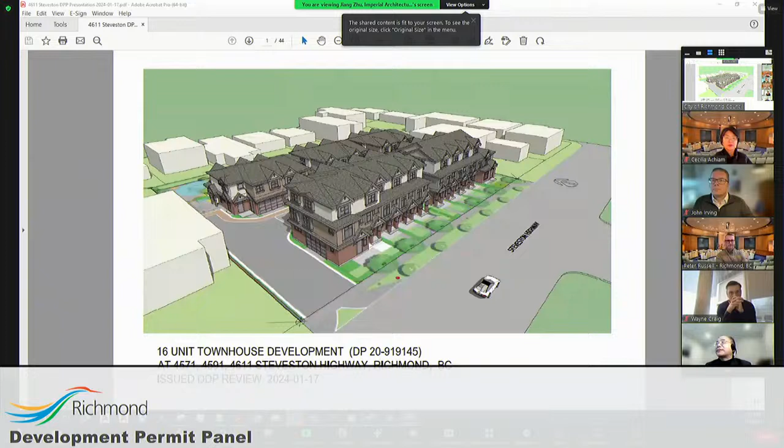Thank you very much. My name is Jiang Zhu. I'm the architect with Imperial Architecture. We are the architect for this development. And I'll share my screen. Could you see the screen? Yes, we can. Thank you. Yes, thank you very much for having us.

Today, we want to present the 16-unit townhouse development along Steveston Highway. The project site consists of 3 single-family sites, and it's located on the north side of Steveston Highway between Railway and Number 1 Road.

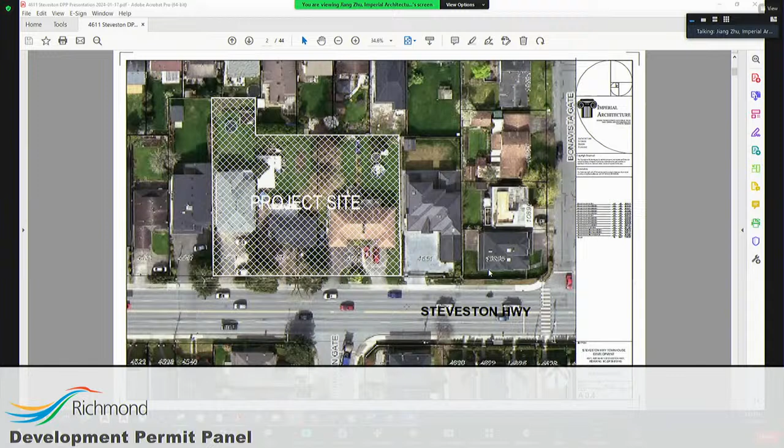During the design stage, rezoning stage, we worked with the planning department on the siting and the forms, and we tried to propose something which can be mixed into the local neighborhood in terms of architectural style.

This is the overall site context plan. We proposed 5 buildings on this site, and there are 2 three-story buildings along Steveston Highway, along the arterial road, and there are 3 duplex two-story buildings at the back with the driveway in the middle.

As you can see in the streetscape, we proposed a big roof on top, and to treat level 3 as dormers or attics. Although they are really level 3, the architectural style is compatible with the adjacent buildings, and the height is not out of scale.

And these are the calculations, statistics. We complied with the bylaw in every aspect except only for the front yard setback - we propose to relax it from 6 meters to 4.5 meters. The main reason is we gave more space at the back. The bylaw says we only need a 3 meter rear yard setback, but in consideration of the privacy with the single-family housing behind, we propose to increase it to 6 meters, so double the rear yard setback. Meanwhile, we reduce the front yard setback a little bit from 6 meters to 4.5 meters.

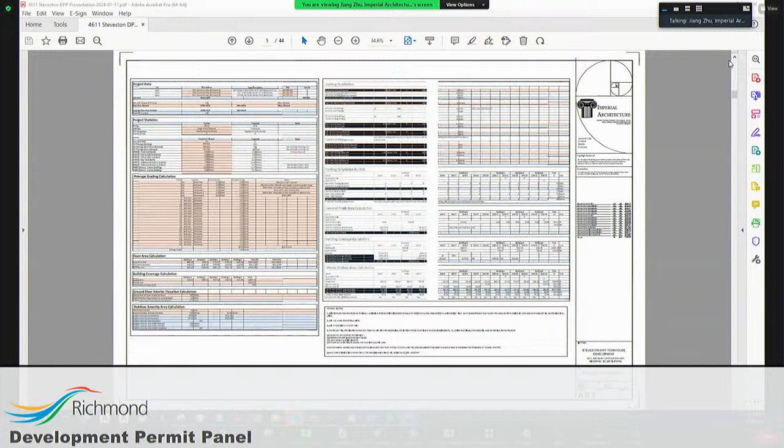So in the rezoning stage, we proposed a future development potential plan. Adjacent sites can do a mirror image of our development by sharing the driveway - they don't need to have a second driveway, they're going to share the driveway. And then they can have a consolidated, bigger shared outdoor amenity space.

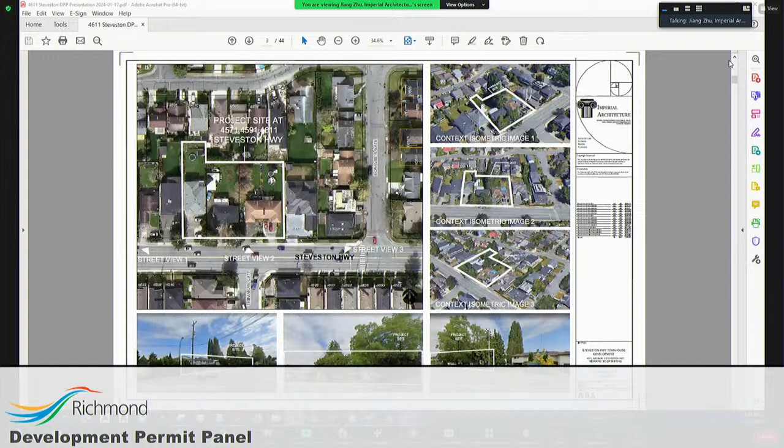For the character, we propose to use the typical so-called West Coast style with Hardie panels, bay windows, and gable roofs as the architectural language for this development. And since we have 5 different buildings, we need to tie these buildings together. Meanwhile, we want to create some differences so each building can have its own identity.

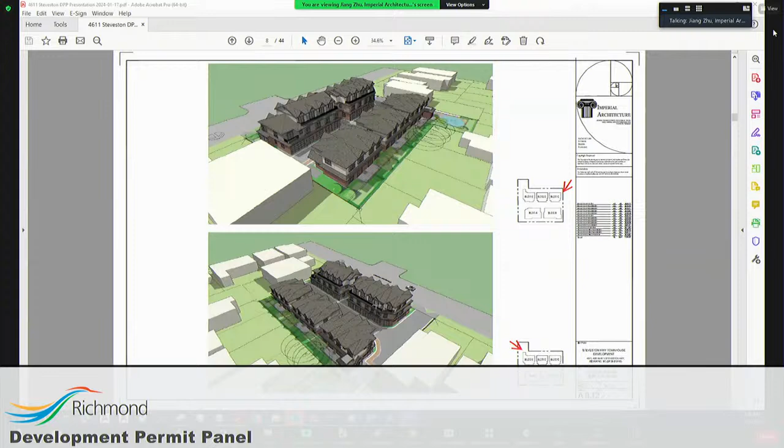One method we used was we proposed red brick cladding on all buildings, on all sides - that is like a base, a solid base for all buildings with the same color, same material. Then on the upper floors, we propose to have different colors for the Hardie panels, and even every 2 adjacent buildings will have a different color scheme. We proposed multiple color schemes.

And also we went through the shadow analysis to demonstrate there was no shadow impact to adjacent buildings.

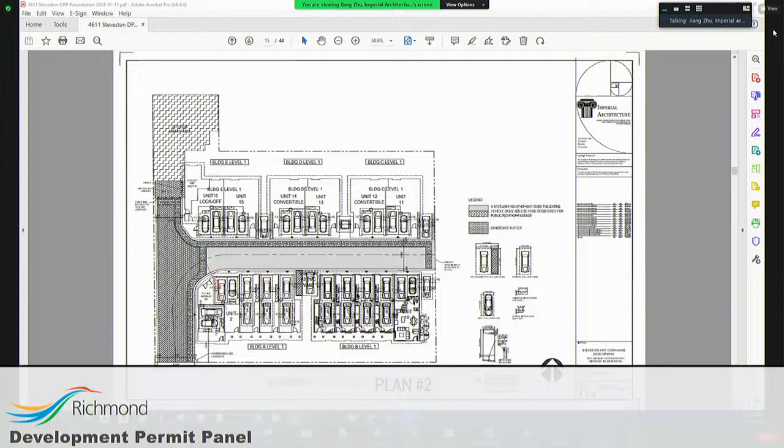We complied with the city's parking bylaw. Most of the units have side-by-side parking, and only a handful have tandem parking. However, it is still within the allowed limits by the parking bylaw.

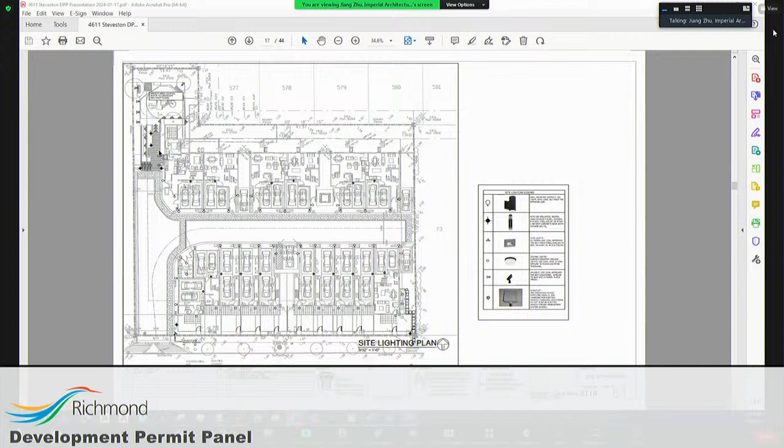Here is the site lighting plan. Every unit in the private garage will have 2 EV chargers. We also propose some exterior lighting in the common area along the driveway for CPTED considerations, and also in the landscaped area. The landscape architect can elaborate more on the lighting design and landscape design in the outdoor amenity area.

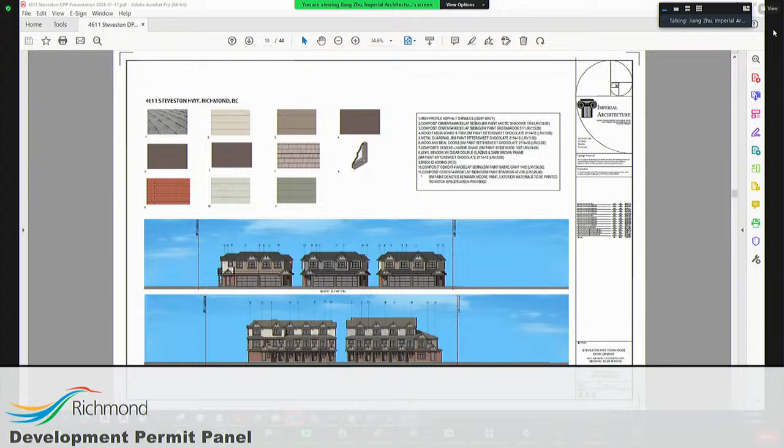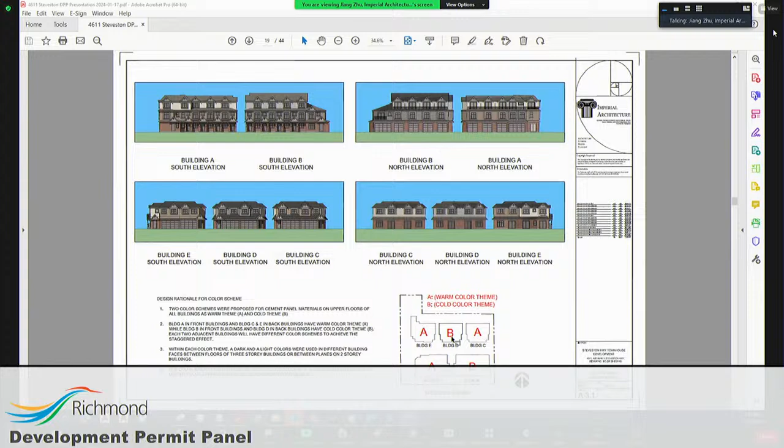This is the color scheme we proposed. We have scheme A and scheme B, with warm tone and cold tone, strategically located so every 2 adjacent buildings will have a different color scheme to make the design more interesting. And this is the sections.

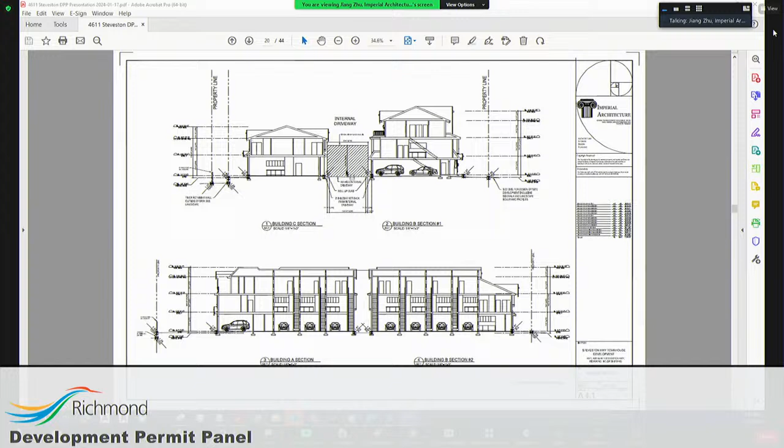We have a 3-story building along Steveston Highway, and a 2-story duplex building against the single-family housing. In the middle, we have the driveway with 4.6 meters height clearance for garbage trucks and fire trucks to access.

For accessibility, all units will have ground level access doors, which can be easily used by wheelchair users. We don't propose any long steps or stairs at the main entry, and pedestrians can use the shared driveway pedestrian walkway to access all units. The outdoor amenity area is fully accessible as well, with a ramp designed there.

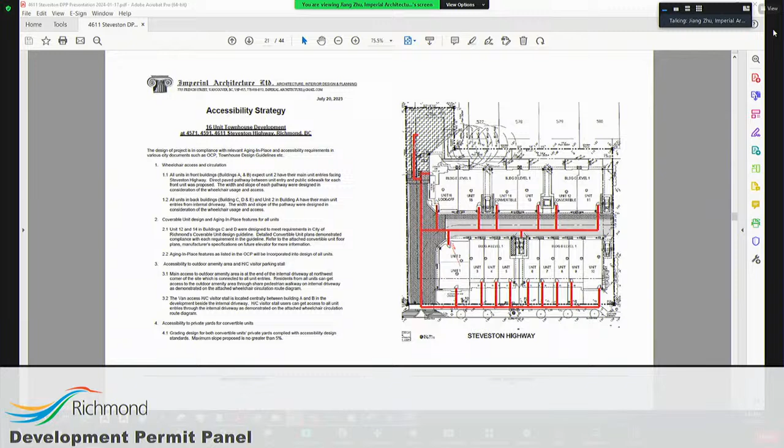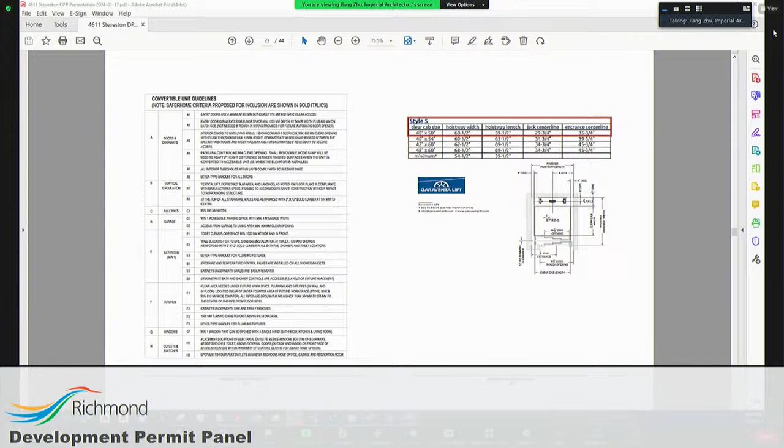We proposed two convertible units fully in compliance with the city's convertible unit design guidelines, with the ABCD criteria, and we elaborated on our drawings how we met these requirements. We also proposed a future elevator, with the shaft built with the floor and pit designed to suit the future elevator.

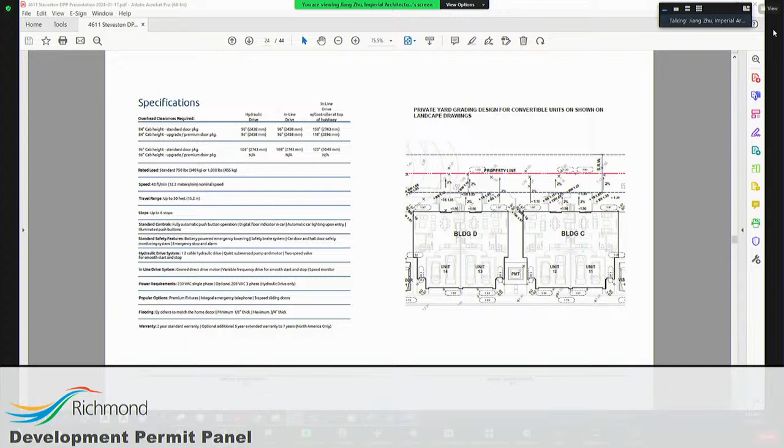This is the elevator specs, and the landscape design for the convertible unit at the back. The rear yard is accessible as well via the deck.

We engaged the energy consultant JRS to help us with the step code issues, and they produced an energy report elaborating how we can meet the step code requirements.

I think that's all from architectural, and I'll hand it over to our landscape architect, Ethan.

Good afternoon, everyone. My name is Ethan, and I am the project landscape architect for this project. Thank you for being here today. For landscape design, I just want to highlight three major things in the landscape.

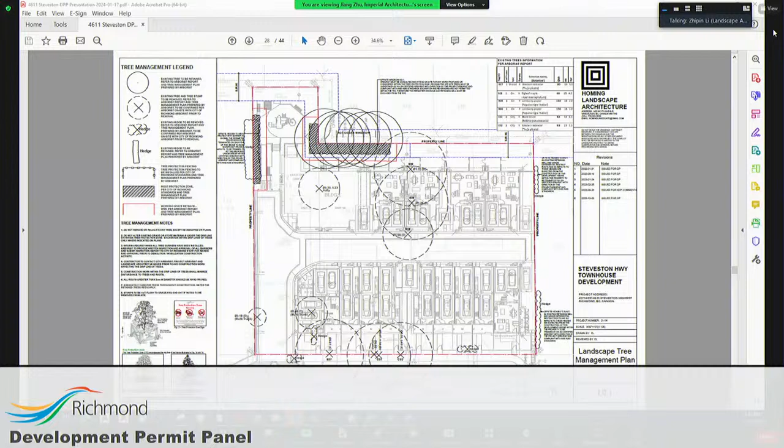Second, we also try to minimize existing grading changes in the landscape design. The large outdoor amenity space is located on the existing grade, and we provide a ramp for wheelchair users to access it. Meanwhile, for buildings close to our north neighbors, each unit will have a private outdoor patio space, but the patio is elevated so the overall backyard is on the same elevation as our north neighbor. So we don't make any grading changes between our property line and our neighbors. This is how the landscape design respects the existing site conditions.

The second thing I want to highlight for the landscape design is how we respect the privacy of our neighbors. Go to the next page, please.

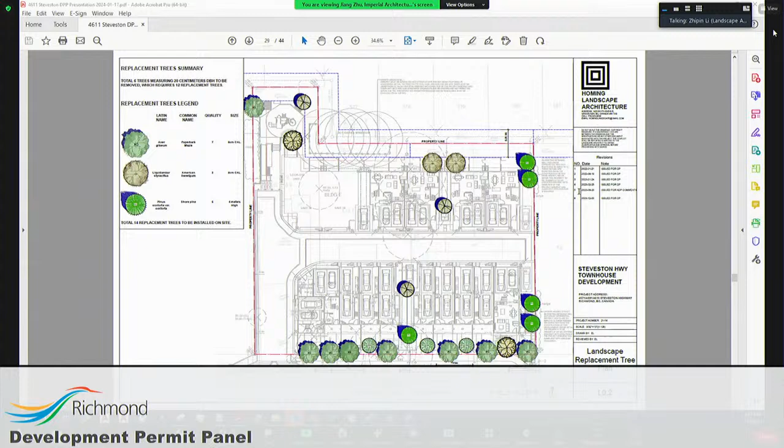As I already mentioned, the evergreen trees and hedges were retained to ensure privacy. Between our property and our eastern neighbors, we have a relatively wide landscape buffer between Building C, Building B, and the property line.

We propose several evergreen trees in the landscape buffer to protect the eastern neighbors' privacy. The third thing I want to mention is the overall landscape design, trying to bring nature close to local residents. We've used a lot of native plant species so residents can learn about them and enjoy our local nature landscape.

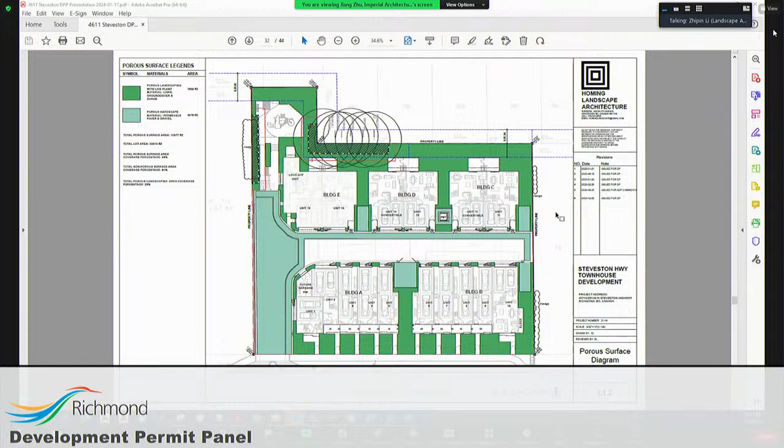We have a relatively large outdoor play area for children, with a few benches for parents to sit and watch them play. In the right-of-way close to our north property line, we keep open lawn areas for multiple flexible programs, for either children or parents. Outdoor lighting is also considered to provide a safe space for people at night.

A few bike racks are provided at the entrance of the outdoor space, along with a post mailbox. I believe all these programs will work together to attract people outdoors to meet their neighbors and do more social activities, which will benefit residents' physical and mental health.

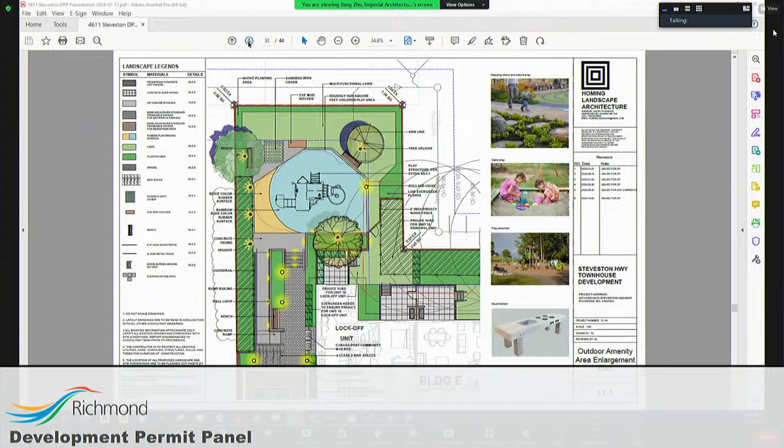For the outdoor amenity space, we also consider the future situation when the west property is developed. The turnaround space at the corners for vehicles will not be needed anymore, so we change these turnaround areas into additional outdoor amenity space.

We put a couple of composite wood picnic tables and benches on the paved areas. Between the benches and the property line, we also propose raised wood planters with three trees to create a landscape buffer between our space and the neighbor.

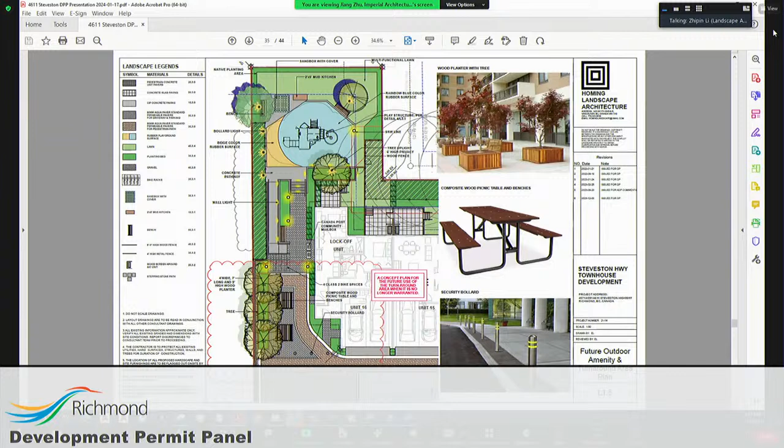Next, please. This is the planting design of the project. As I mentioned, we have used lots of native plant species. I think that's all for the landscape design for this project. Thank you very much.

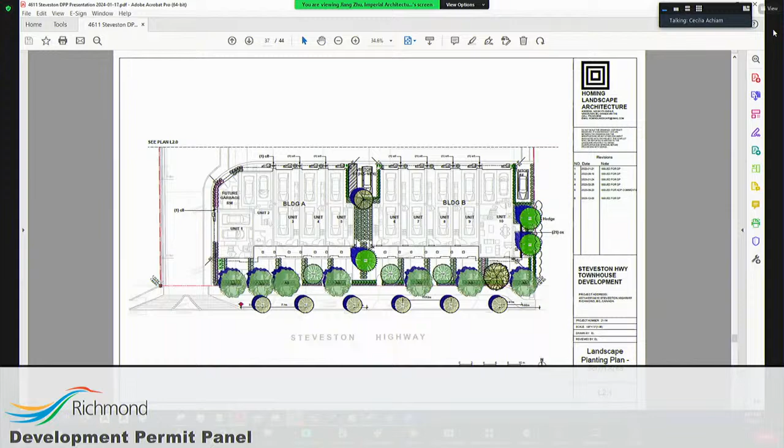Thank you. We will next go to staff comments before the panel asks questions. Mr. Craig, anything to add? Just a couple of comments, Madam Chair.

In terms of the applicant's presentation, the reference to shared amenity space with the potential future development to the west - I just want to clarify that there is no formal sharing arrangement secured as part of this development permit.

Sorry, I just can't hear Wayne. I don't know if it's my mic or my speaker, but it's very faint. Yeah, it's very faint. What? I'll see if I can increase that.

To start again: in terms of the applicant's presentation, there was reference to potential shared amenity space with future development to the west. I just want to clarify there is no formal sharing arrangement of outdoor amenity space secured through this development. That is a design intent which may be realized, but there is no formal sharing arrangement between the two potential developments. In terms of the development itself, this is designed to meet Energy Step Code 3 with on-site low-carbon energy systems.

There is a servicing agreement for frontage works and site services with this project. This servicing agreement will include the provision of turning restrictions within the driveway to ensure right-in, right-out turning movements. The front yard setback variance was identified at time of rezoning. There was also an acoustical report provided confirming that the units will meet CMHC internal noise standards given the proximity to the road and traffic along Steveston Highway.

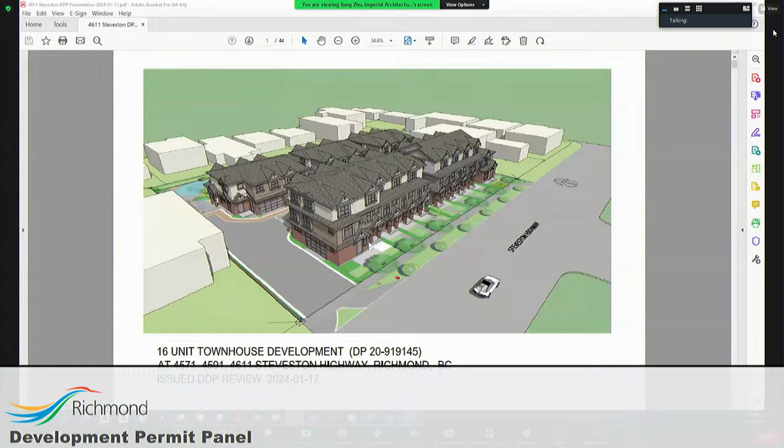Some units are the same, but the end units - the west end of building A is different, and the east end of building B is different. Therefore, the design is slightly different over there because of the roof geometry. However, it is still within the zoning bylaw height limitation over there.

So it's just an aesthetic treatment to provide some brightness. That's right, that's right, yeah.

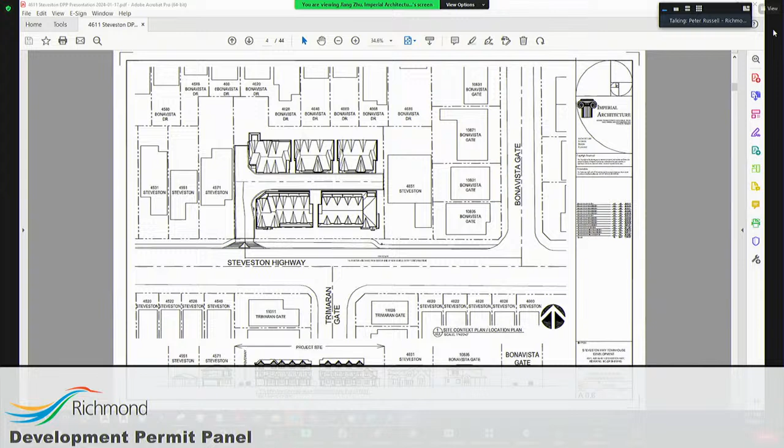Thank you, I just had one question, Madam Chair. I'm just looking at the entrance from the highway - is it only a right in, right out turn on the highway? Is that a policy of ours? I'm not sure, I just haven't been involved in too many Steveston Highway projects.

So you can't do a left turn if you're eastbound into the site? Yes, due to the proximity and the road, this does have turning restrictions. There are some instances where townhouse development does have those turning restrictions. Steveston Highway is quite common that we limit driveway access to right in, right out. Okay, thank you, that makes sense.

Okay, I have a couple of questions. One is I do appreciate relocating some of the existing vegetation and keeping the grades the same for the adjacent neighbor. It looks like there's quite a lot of care put in place for that. There seems to be quite a lot of paving as these projects have. Can somebody comment on whether you have made some effort to incorporate pervious areas into the driveways?

Yes, for the driveway, the city fire department has a very strict requirement for 80,000 pounds of load over there. Therefore, we normally use asphalt to comply with that requirement. However, during the design stage and planning stage, we worked with the planning department to introduce some pavers. They are permeable pavers, and with the special civil design and base layers, they can still support the fire truck load. It's a common treatment for this type of townhouse project.

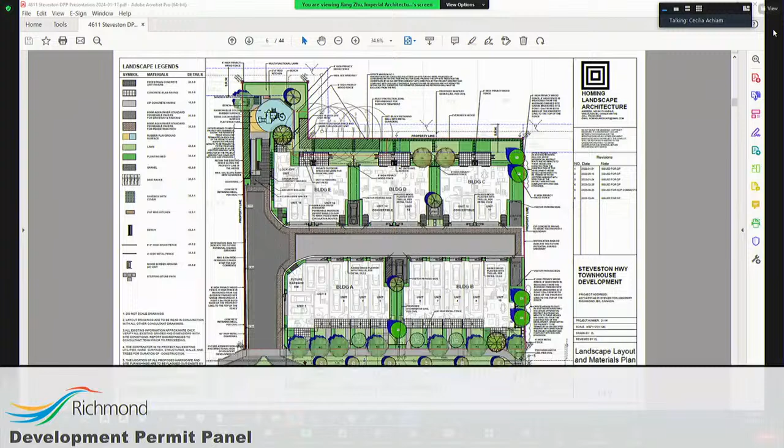Thank you very much, any further questions from the panel? Okay, hearing none - Mr. Clerk, is there anybody in the chamber from the public to comment or ask questions? There's nobody in council chambers. Thank you, is there any written submission? There's none, Madam Chair, thank you.

So in that case, there is a positive recommendation from staff, and generally I think that the design has taken into consideration future developments on both sides by allowing cross-access agreement, and respected the neighbors to the north by giving extra setbacks. So I'm happy to support the front yard setback as well.

With that, does anybody else want to make some final comments before we put this to a vote? Just echo that - likewise, I just wanted to also note the high performance on zero carbon with the electric boiler addition to the heat pump.

Okay, with that, can I have somebody move the staff's positive recommendation? Second. Okay, thank you. All those in favor?

Hello, everybody. My name is Karla Castellanos from KCC Architecture. I'm coming down with a flu, so I'm going to just hide myself a little bit, but I can still do the presentation. I'm going to ask Emily from my team to share the screen, please. If you can go ahead, Emily, please.

Thank you. So today I would like to make the presentation for a subdivision and new development application. In reality, it's not the subdivision at this time, but it's a development permit based on the subdivision of an existing property with an existing building. Next slide, please.

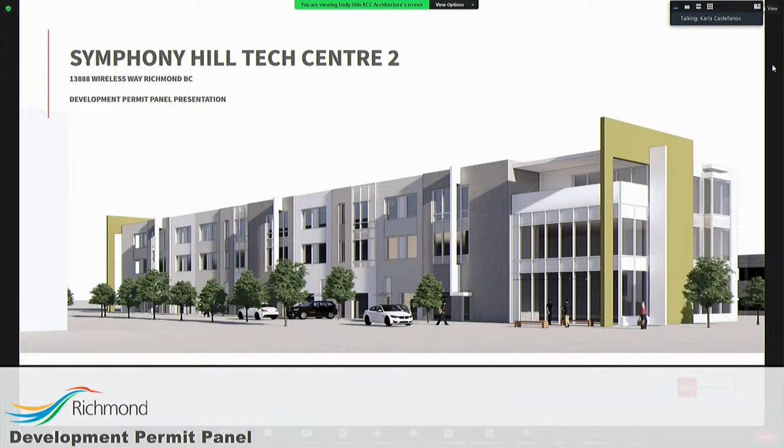For the introduction of the project: the project is located in a mainly industrial area with a business park development. Our project follows the initiative issued by the city a few months ago — actually last year or 2 years ago — to redensify industrial land.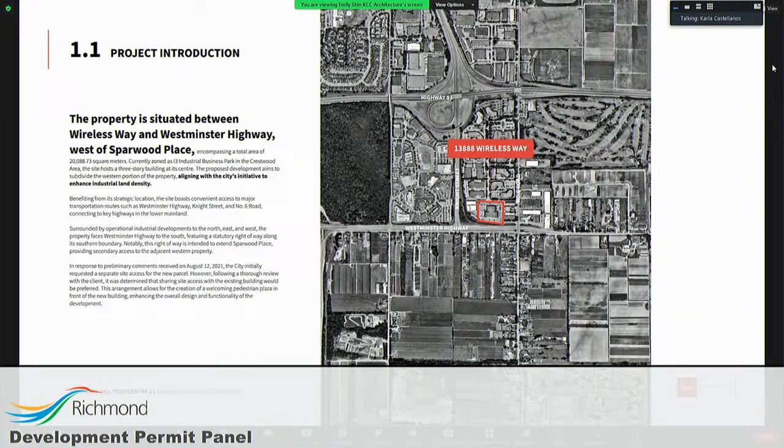For the project context, as I mentioned before, our project is located mainly within the areas of industrial development, business park industrial, and very close to the Richmond Auto Sales Center. Our main traffic will go through Westminster Highway, Number 6 Road, and Knight Street. Our project is zoned under ZI3, which is Industrial Park Development.

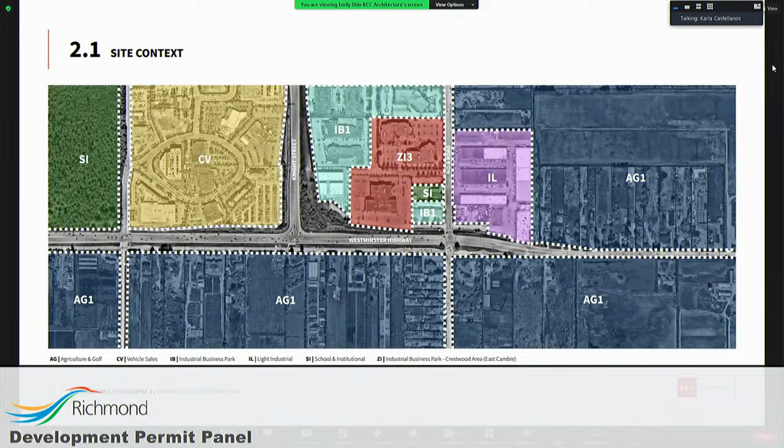The applicable policies and guidelines include climate action programs, community energy and emissions plans, development permit guidelines, flood protection management strategy from 2019, the official community plan, and waste management design guidelines.

Going into the design proposal: our proposal is to redevelop this existing site through a subdivision application, generating a new lot. The new building will house 3 stories, with the first 2 stories being multi-tenant industrial units. The ground floor will be the main warehouse, or working area, with the second story being office space, and the third story for additional office space.

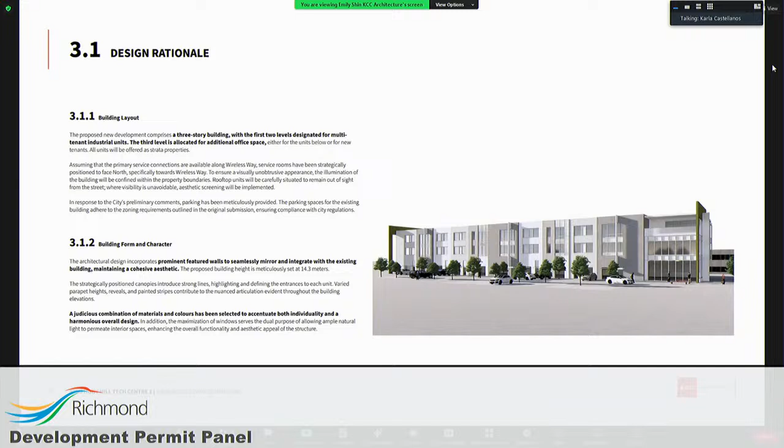The building form and character follow strictly what the existing building has. It mimics quite a bit the harmony, and also the articulation between the units and the colors. So the intent is not to create contrast, but the opposite — it will mimic and feel like an extension of the existing building.

The accessibility strategy is on the north side, facing Wireless Way, which is on the top of the sheet from this floor plan. There is a pedestrian access into the main building. For clarity of the panel, Lot 2 is existing, Lot 1 is new. There is the property line — the new subdivision is right in between these 2 buildings.

Unfortunately I cannot share my screen, but in between the 2 buildings, on the left side, which is Lot 1, is the new development. On the right side, as I mentioned before, is the existing building. There is no intention to have any barrier between the 2 lots.

Both lots are currently owned by the same developer. The intent, following the city's initiative, is to redensify the industrial lots and provide more space for potential tenants. For the accessibility strategy, from the top of the page at Wireless Way, there is an access point into the site.

We'll go into more detail in a second, and it connects right away with the main sidewalk adjacent to the new proposed building. For the existing building, as part of this development permit application, we're also providing another access on the right top corner. If you can see there's a hatch between the parking spaces, that is the pedestrian access we're creating from Wireless Way to connect to the existing pedestrian walkway.

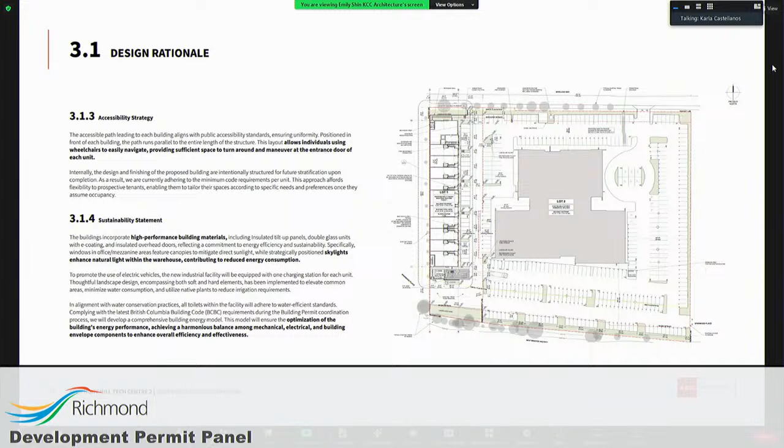Given that these are going to be tenant units, we're going to provide the minimum lighting and minimum heating and cooling. Every tenant will need to apply for a separate building permit application to outfit their own space. But as much as we can contemplate at this time, we are following energy performance strategies. Next slide. So in terms of the building setbacks and the legal of the property, I think this is a better slide

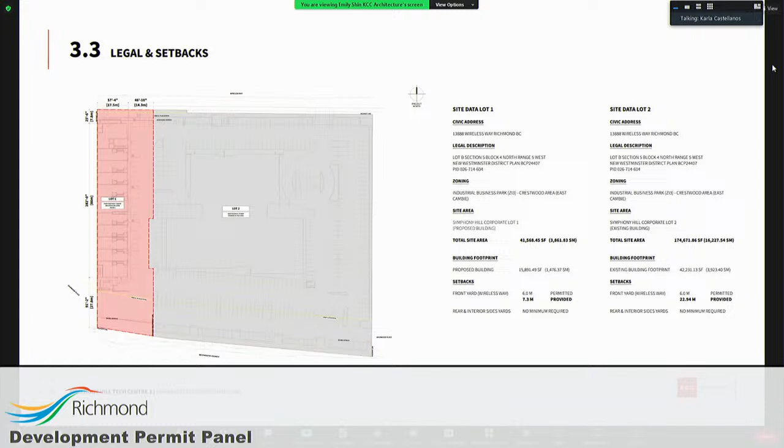to represent where we are proposing the subdivision between the two lots. To clarify a little bit, there is a jog in the proposed new property line, and this is just to reflect the spatial separation required to retain the existing windows on the existing building on the west side. Again, we're trying not to create any higher impact to the existing facility while redensifying the site. Next slide.

So we have developed project statistics for both sites. The existing site, in relation to parking spaces, had above and beyond what was required. So with this new development, the intent is not to remove the parking that is required by zoning in the existing building. Next slide.

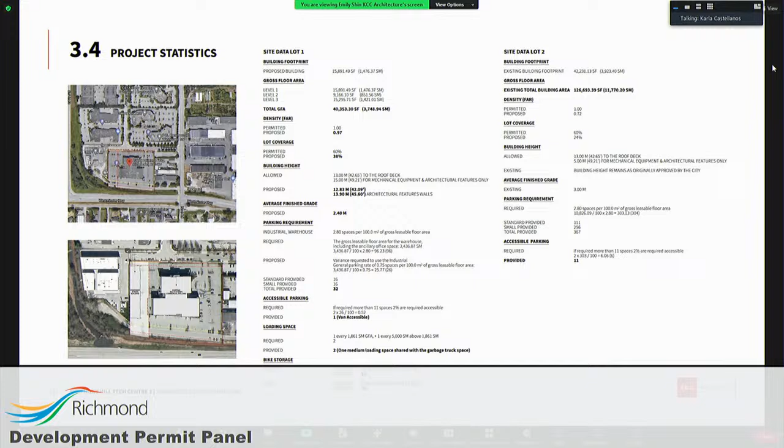which is still independent from everybody else. So we're trying to build this facility with flexibility, so the tenants that come can actually mold their own space, which in my view is already pushing a little bit the boundaries of sustainability, trying to make a building as flexible and useful as it can be. Next slide.

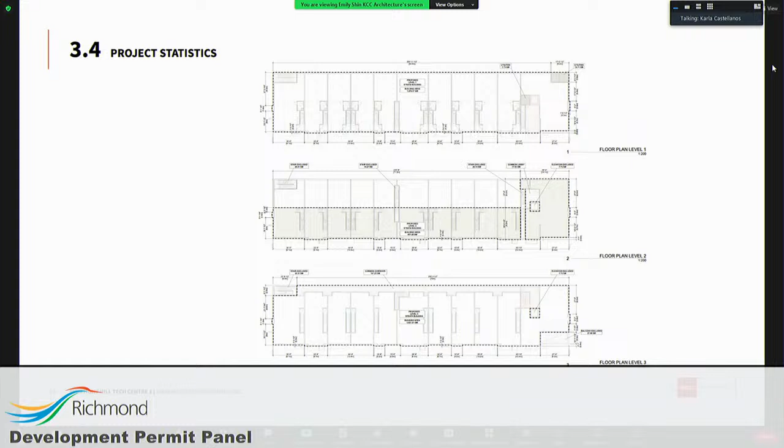The site plan, just to run you through: from the top, Wireless Way facing the street, we have the main access to the site on the right-hand side. We explored the option of providing a separate access for the new proposed lot. However, given the circulation of the site, the security, and the strategy the client wants for marketing not only this new building but the complex as a whole, the decision was to keep only one access point, which will be the existing access through the existing site.

As I mentioned before, the parking is basically shared; there is no boundary between the two developments. I also want to mention that on the bottom of the page, which is the south end of the property, there is an environmentally sensitive area. Currently, that area is completely used for parking; there are no islands, no treatment to that area. As part of this development, we have worked with planning to enhance that area and provide more green space across both sites, not only the new addition.

So as you can see there on the south end of the building, we have incorporated some islands in between the parking spaces to enhance that sensitive environmental area. And in the new lot, in the new property we are creating, the new environmental area is completely landscaped.

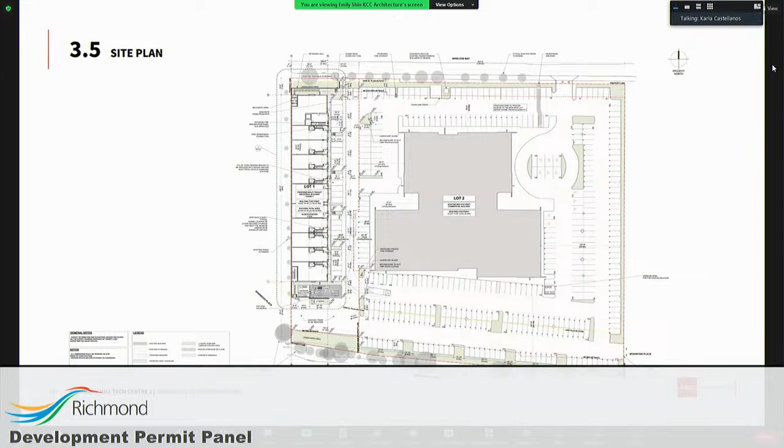There is parking in front of the units, where the intent is each unit on the ground floor will have an overhead door. The overhead door can be completely open, and the tenant can park right in front of it to download or upload any product. At the south end of the new building, we've provided the garbage facility with garbage collection space, and right beside it, a loading space as well to provide additional service to the tenants.

This would be an enlarged, more detailed floor plan. If we take any unit in the middle, let's say the fourth one from left to right, we have the overhead door, an independent entrance with a little vestibule. You come up the stairs to the mezzanine above. Underneath the stairs is an accessible washroom for each tenant. On the floor below, you'll see the mezzanines above where you can fit 2 office spaces, or 1 office space with a boardroom, and the stair which has access to the floor below.

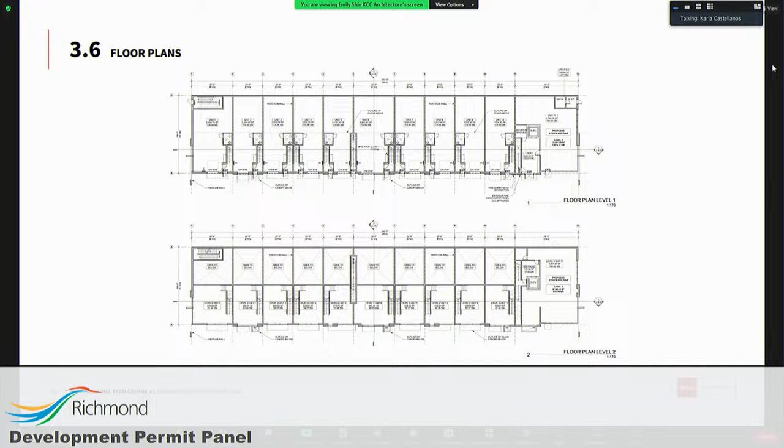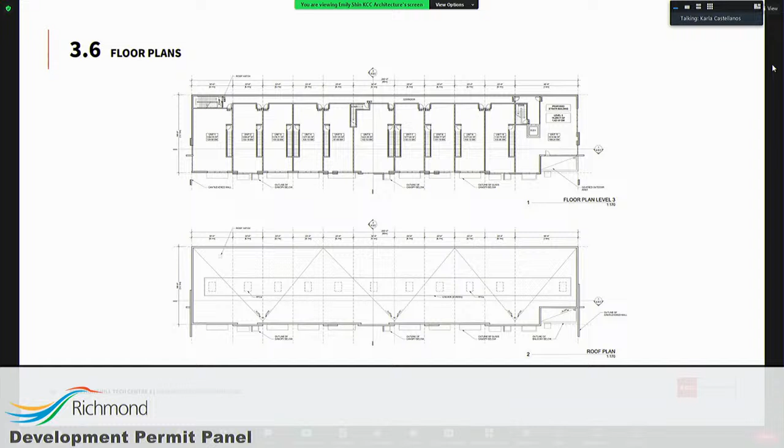On the 3rd level, we have independent units for office space. We've provided the stair to connect this office space to the mezzanine below, however this will be optional for each tenant as they desire. We've also done a study at the roof level to identify where potential rooftop or air conditioning units can be located. Based on our analysis from the street, they should be located in the middle of the building, and we will provide proper screening for any mechanical equipment.

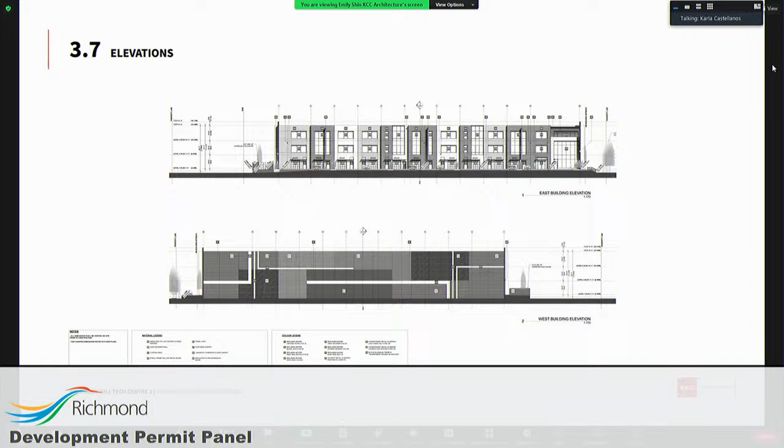These are the elevations of the building. As I mentioned, we're carrying a lot of the language of the existing building into the new building. One of the more challenging design components is precisely that west building view. To maximize the building layout and footprint, our strategy was to place the building right at the property line, creating this flat facade. We cannot have any windows opening to a neighboring site, but my team and I decided to treat that wall with different textures. This is tilt-up construction, which can actually have many patterns within it that are quite appealing to the eye. Our intent is to create an interesting pattern with interesting colors to mitigate that flat, stark view from the neighboring site. The building is quite narrow and long.

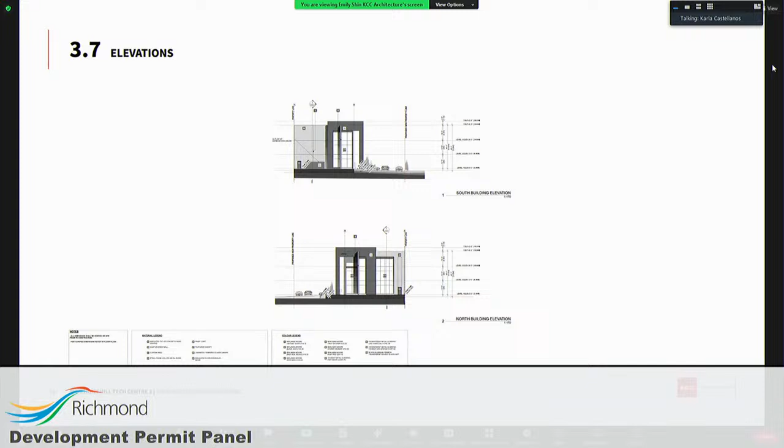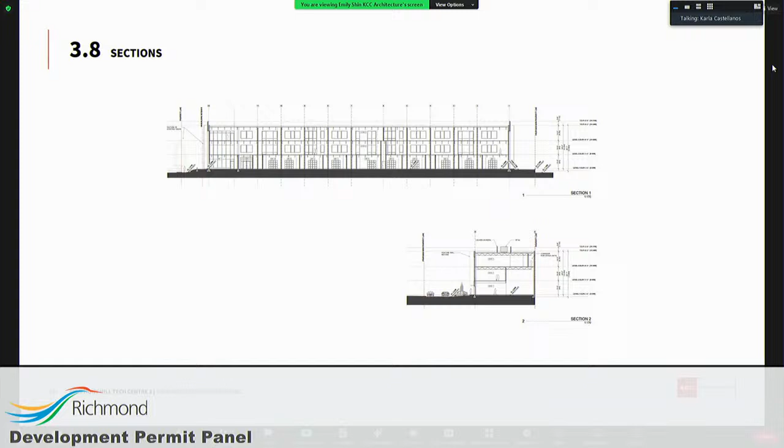To accomplish what we're proposing, we are requesting 3 variances. The first is to reduce the number of parking spaces from 2.8 spaces to 0.75. The reasoning behind this is the initiative the city has issued for industrial sites and industrial use sites, where reduction of parking spaces is allowed, considering this is not retail, not commercial use, and not necessarily a full office space. This is based on the initiative the city published. The second is we're also requesting to combine one loading space, as the new building requires 1 loading space.

We are requesting a variance to combine one loading space with the garbage parking area. If you see on the south end of the building, at the bottom of the page, that big gray rectangle, that's the garbage and loading space. A strategy could be developed by the Strata where garbage pickup comes on a certain day and time, and all tenants are notified so they can't use that loading space that one day, but the other four, five, six days they can use it.

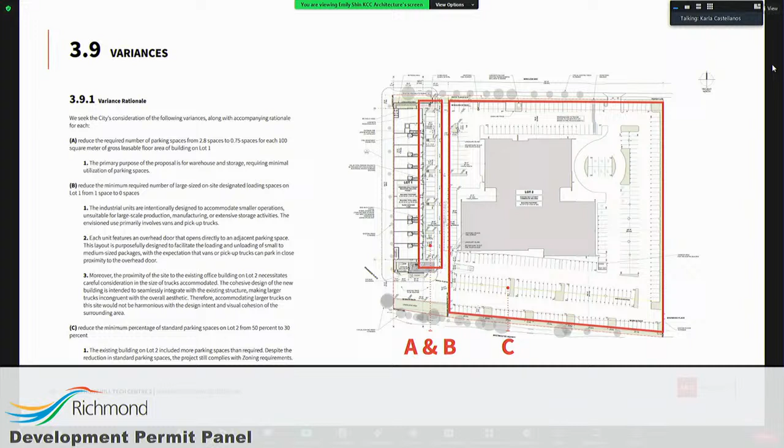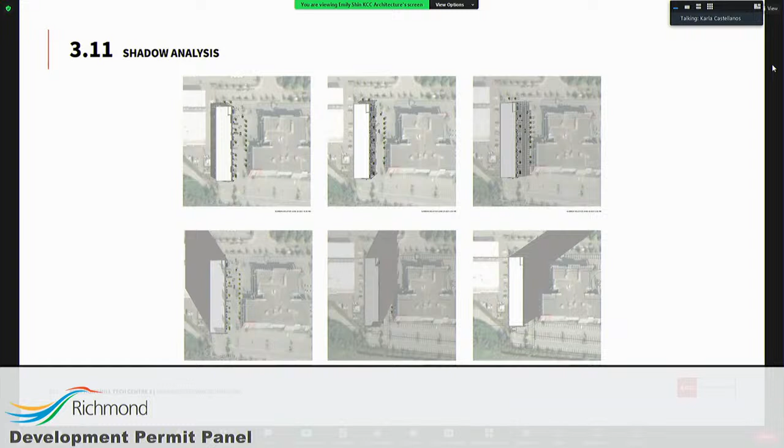I'm going to let Clark speak to the landscape drawing. Thank you, Karla. Clark Kavolinas, landscape architect on the project. I'm just going to make three quick points with respect to landscaping on this particular project.

First point is in front of the new building on the east side where the parking is. We've broken up the parking with some landscape and treed islands to give it some relief from the parking and the asphalt in that area.

Second point, which Karla made earlier, is along the south property line. Within the RMA setback, we've provided native plants, all indigenous and native plantings, a buffer of natural plants to separate us from the environmental area to the south.

Third point is on the east side of lot 2, the east side of the total site. We're going to plant a row of trees to give some relief along the parking there, and we're going to cut into the existing asphalt in the existing parking to provide three trees for more relief on that side as well.

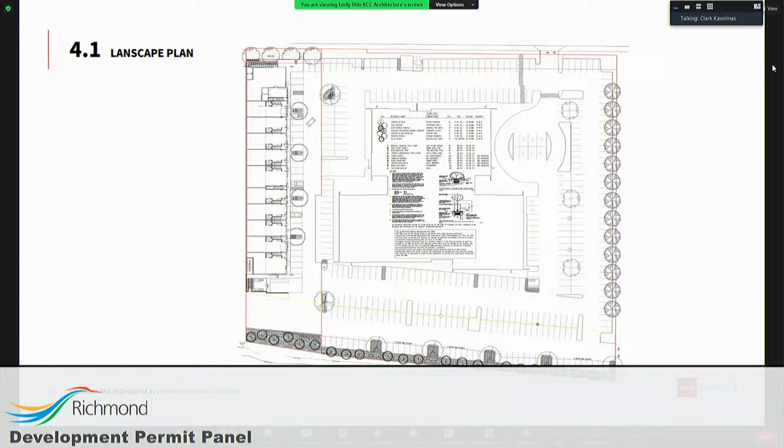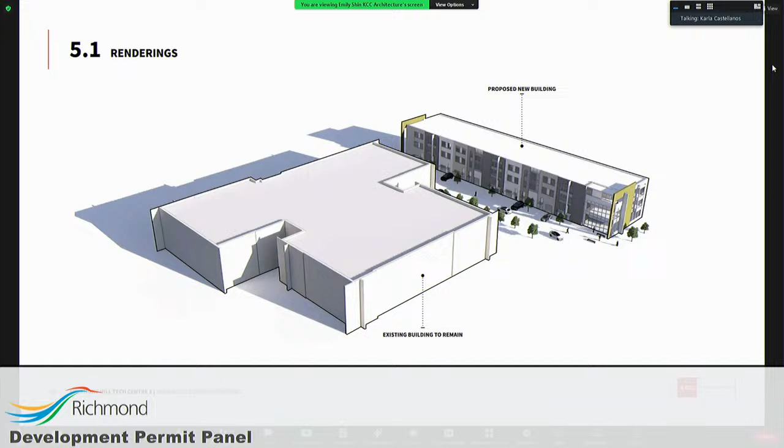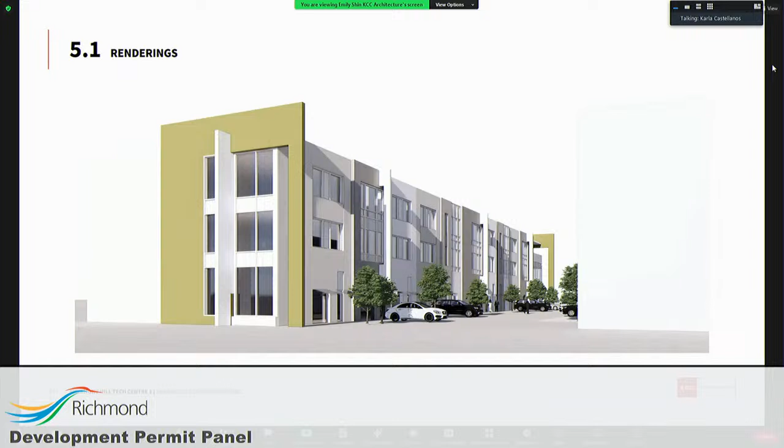The next slide, please, just to wrap up. You can see the two volumes: the white one is the existing building, and the one with colors is the proposed new building. We have taken into consideration the code requirements for spatial separation between the two buildings, car accessibility, pedestrian accessibility, fire truck, and garbage truck access. With this, I would like to finish our presentation.

Thank you for the very thorough presentation. Does staff have anything to add? Just a couple of comments.

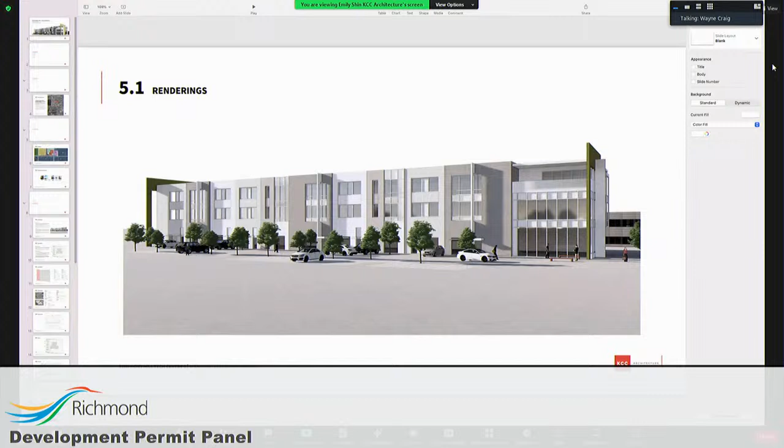There is a servicing agreement for frontage works required as a condition of this application, tied to the building permit application. In terms of the riparian management area along the southern edge of the site, there will be invasive plant removal within that area, and a three-year monitoring period over the planting within the RMA area. There will also be an ALR buffer covenant registered as a condition of this application, as the ALR exists on the south side of Westminster Highway.

The project also includes provision of solar PVs for on-site electricity generation. Approximately 40%, or just under, of the roof of the proposed building is intended to be occupied with solar PVs. I'd like to thank the applicant for their efforts to address sustainability, not only in terms of RMA restoration and enhancement, but also the use of solar PVs.

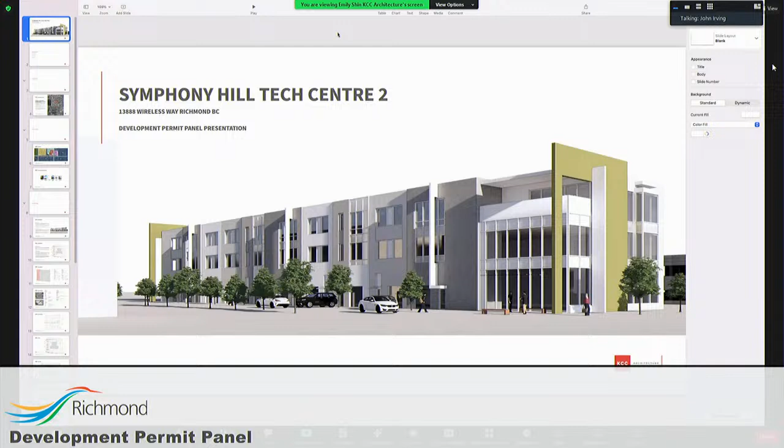I guess just on the park, and appreciate what you're doing. It's great to see asphalt turned into usable industrial space and returned to RMA. But this isn't a stratified building you're proposing, is it? Or is it? Yes, it will be.

Okay, and so how many units? We have, I want to say 13 units, but give me 2 seconds. 11 units, actually - it's Ellen here. Oh, it's 11 units, yeah. So the 3-story, I thought maybe the top story were those separate units, or they're all? Oh no, they're one single unit. They're three-story, but all one single unit, and rooftop - that's why they all have their own solar panels. That's right, necessary with BC Hydro for each individual unit. Okay, so 11 units.

So, almost 3 parking spots per unit - is that right? Yes, average, I think, around that. Okay, I mean, I'm certainly no fan of producing surplus parking, and maybe it's for staff. Appreciate the design.

Obviously you're going to be able to use the existing parking lot on lot 1, or is it 2? Plus, we have shuttle service - we provide shuttle service from the site, and we have a few years of transit pass as well for each individual unit. So there is a shuttle service that will operate 10 trips a day to the Bridgeport station, 5 in the morning and 5 in the late afternoon. Yeah, it's a free shuttle.

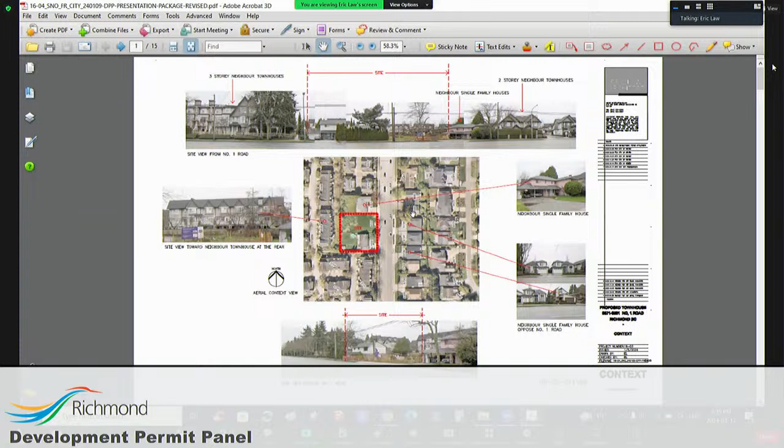With that context in mind, our design rationale is that we will do 3 blocks of townhouses with access on the north.

The reason we put the road on the north is to serve 6551 on the north, so they can share our road for their future development. The whole road is registered as a right of way to them so that in the future they can develop their own lot and we can share the driveway with them.

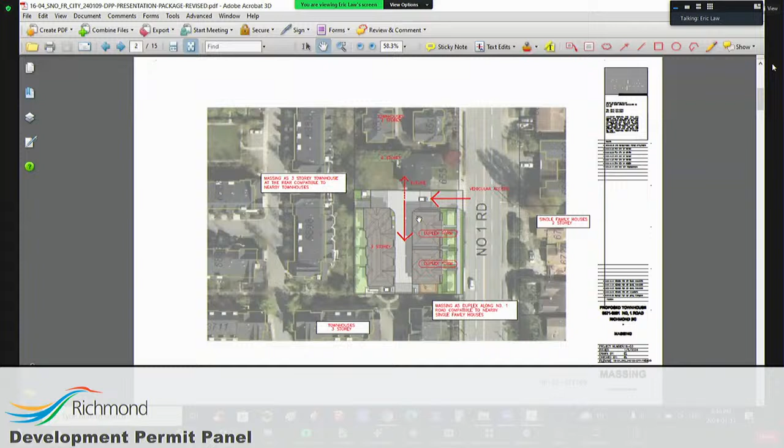For the massing of the townhouses, we basically provide 3-story height at the back, which responds to the 3-story high townhouses there, and the south is also 3-story townhouse. Although these two blocks facing Number 1 Road are designed as sort of a duplex.

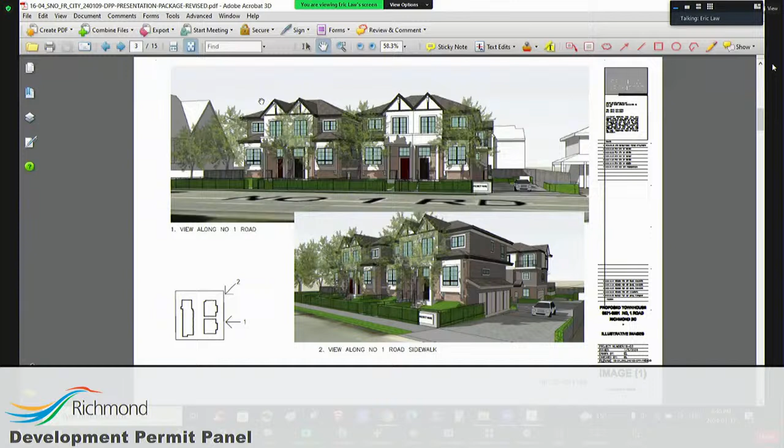Even though it's 3 stories high, because we berm the landscape a little bit and the road is lower, from the outside along Number 1 Road it looks like a 2-story building, similar to the neighbor building, the townhouse, and the single-family house on the opposite side and next door. So from this perspective, the massing basically looks like a single-family house with a duplex form.

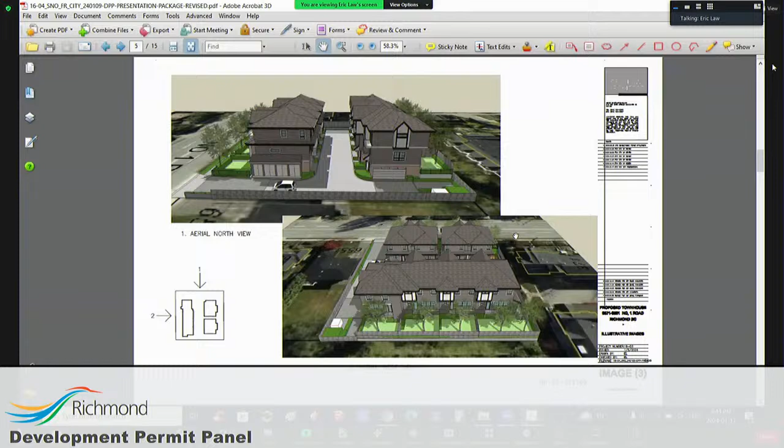Architecturally, the form and design is a pitch roof with windows, matching typical residential townhouses or single-family houses. For finishes, we use brick at the bottom for a typical residential feel, with Hardie siding and a pitch roof. So the design tries to be consistent with the context around it.

In terms of vehicular access, we have access from Number 1 Road on the north, then come down to the end of the drive. We have a children's playground and visitor parking along the back.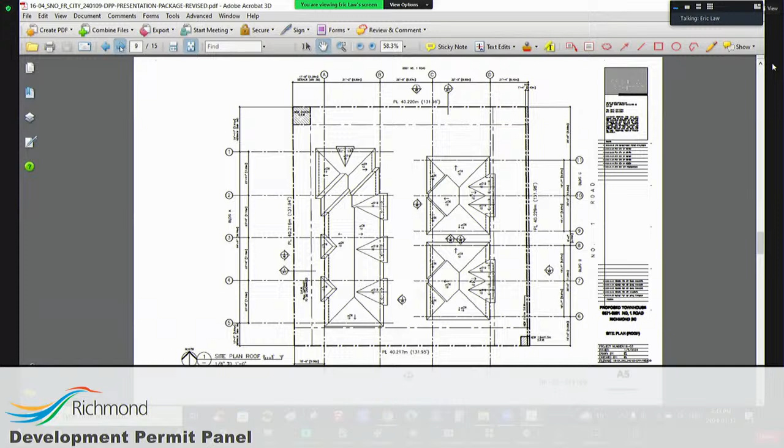In terms of accessibility, we have one unit with future disabled access allowance, as this particular unit allows for a future elevator inside, so it can be retrofitted and become a convertible unit to allow for full accessibility.

For this townhouse, we are going to meet Energy Step Code 3 with a low carbon system. Basically, we are using a heat pump system for heating and cooling for this whole project.

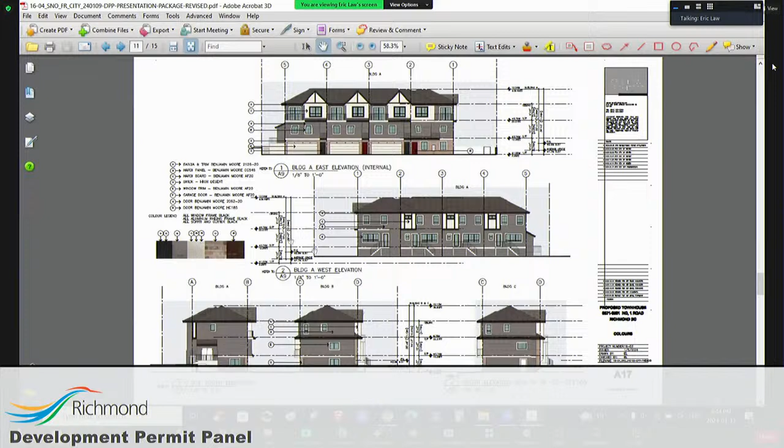And for the siding and finishes, the colors use material siding with brick at the bottom.

For the landscape, as you can see from the drawing, we have permeable pavers around some of the edges, and a children's play equipment area on the south side as part of this small play area. All the landscape along Number 1 Road is a berm, sloping up a little bit so that along Number 1 Road it feels almost like a two-story building instead of a 3-story building.

So for the other landscape details, I'm going to ask our landscape architect to do a presentation.

Sure, thank you Eric. My name is Yiwen Ruan. I'm from PMG Landscape Architects.

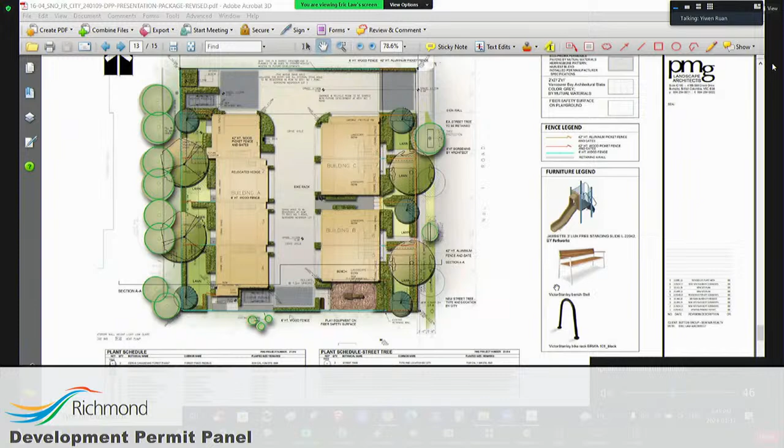As Eric said, our landscape is trying to create a large landscape area for each unit. For each unit's yard, we have a big open long area for family or kids to run through, and each yard has one tree. At the side entrance and the end of the road, we use a permeable paver to mark these key points.

As Eric said, the play equipment is located on the south side of the site. We chose this comprehensive play equipment to ensure numerous kids can play at the same time, and there's a bench next to it so parents can watch the kids.

In total, we propose nine trees and hundreds of shrubs and grasses integrating native plants into this project. Lastly, all the soft landscape will be irrigated. That's all for the landscape point.

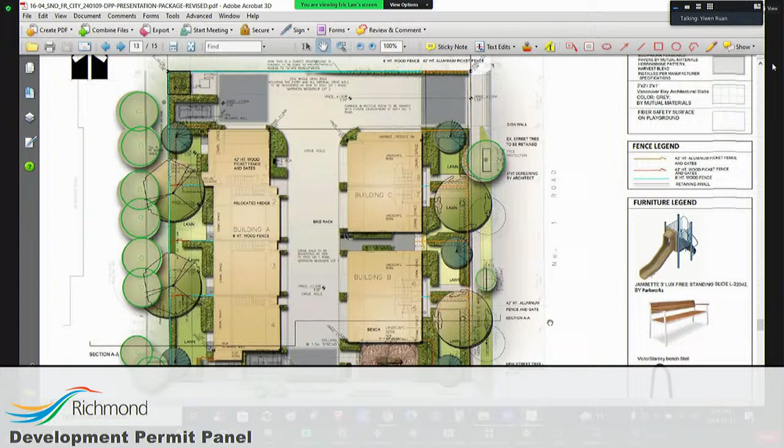One thing I just want to say is that for the whole site, there's only one tree we're going to remove, because the arborist said structurally it's going to die anyway, though it's currently safe. There's another tree off-site, not within our site, that has already died. So technically we only remove one, but with the neighbor's tree on the north side, we are providing almost 4 replacement trees, plus 5 additional new trees within our site.

And I think this concludes our presentation.

Thank you, appreciate that. Mr. Craig, any staff comments?

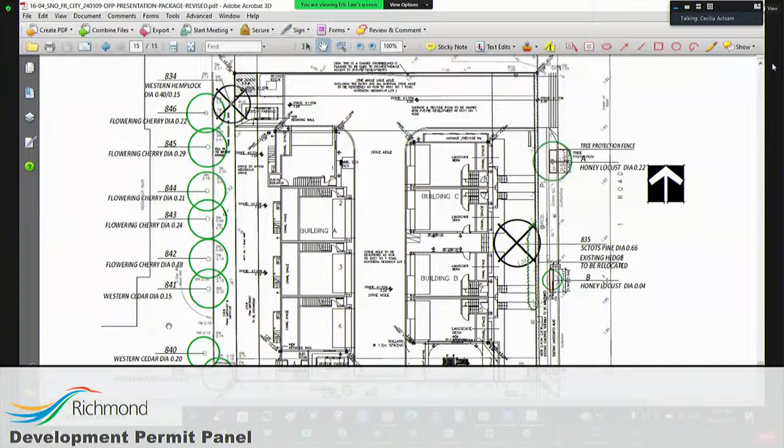A couple quick comments. There is a servicing agreement associated with this project for frontage works and site services. In terms of the variance, that is a technical variance based on the site assembly, which was identified at time of rezoning when council endorsed the rezoning application.

Okay, thank you. For the time for the panel's questions, John and Peter. Thank you, Madam Chair, if I may.

Maybe you could just describe for me the grading. From what I'm seeing on the plans, it looks like this is sunk lower than the adjacent properties. Is that the case, and why are we doing that?

Yes, the grading is that there's the existing road, existing Number 1 Road that goes down to around 1.0 meter. That is the elevation, basically what we have right now, so we are not going down anymore. We are just keeping the same level, although the Number 1 Road is higher.

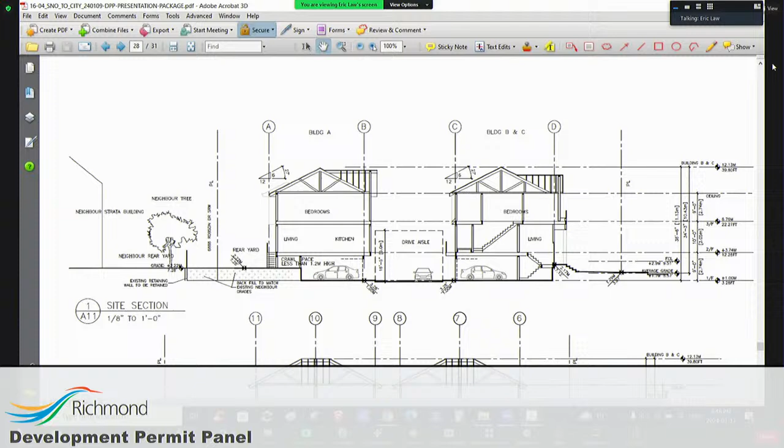But the other one is at the back. Basically, what happened is that the back neighbor's yard level is higher, at 2.22 meters, but then there is also a jog or recess within their site. So we have already agreed with the neighbor that we will backfill the back level to match the neighbor's yard, so that our yard will be the same level, and our unit will also go down. The back unit will go down to the rear yard for their recreation or leisure enjoyment.

The other reason, actually there are a few reasons. One is that this site has a floodplain level, which is somewhere about this level, and the lower level we cannot have any residential or dwelling unit below the floodplain level. That's why we put the parking on the bottom.

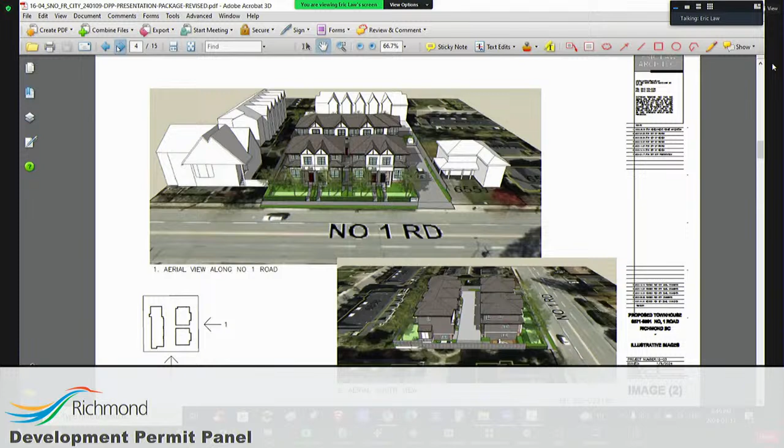And one of the reasons also, if you look at our site plan, let me show you. We are intended to provide access to the north neighbor so that they can develop their townhouse in the future. In order to do that, we have to match the existing level. So the road right now going down, this level 1.0 closely matches the next door neighbor, so that they can easily go around to access the north neighbor instead of going up or down to the ramp. That's why we retain the road elevation as roughly 1.0 meter at their level, so that it facilitates future extension to the north, as well as to serve the parking.

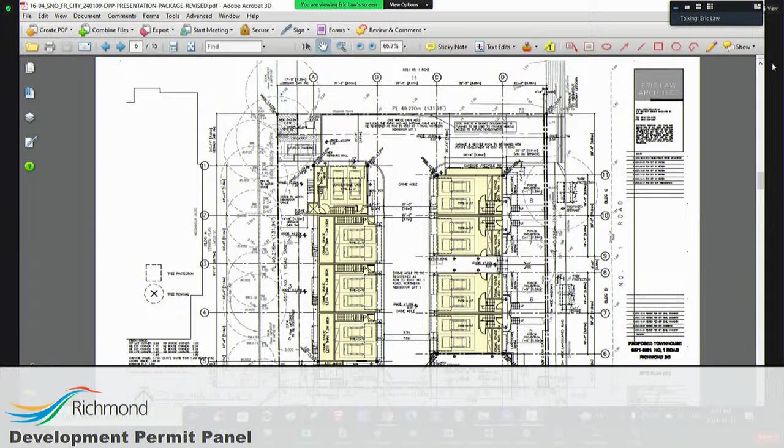And then because the parking is on the lower level, the second and third levels can be used as residential, which is above the floodplain level. And that's the reason why we do this grading. One of the good things also is because we raise the living room a little bit higher, you can have a landscape berm around this area, so that, as you can see in the perspective, the apparent height of the townhouse facing number 1 road will be lower and looks like a 2-story duplex instead of a 3-story building. I hope that explains the rationale why we do this grading.

Yeah, okay, well that's just raised more concerns for me if part of the intent is to hardwire a similar lower grade for the lot to the north. That's even more problematic. I mean, just wearing my engineering hat, and appreciating your meeting the letter requirements of the bylaw with regards to flood grades, but we have a lot of problems with lots that are lower than the road like this, especially with climate change and increasing storm intensity, atmospheric rivers.

The storm system in the streets is only designed to handle what used to be the 10-year storm. Now it's really probably the 5 or 2-year storm. So unfortunately, in this design configuration, from an engineering point of view, I would not be surprised to see this parking level flood once every 2 or 5 years. That, unfortunately, for me is not something we could saddle future owners with. And we're not just talking floodwaters, we're talking potentially sewage as well. We've had this actually occur on similarly designed lots previously. So I have significant concerns with that.

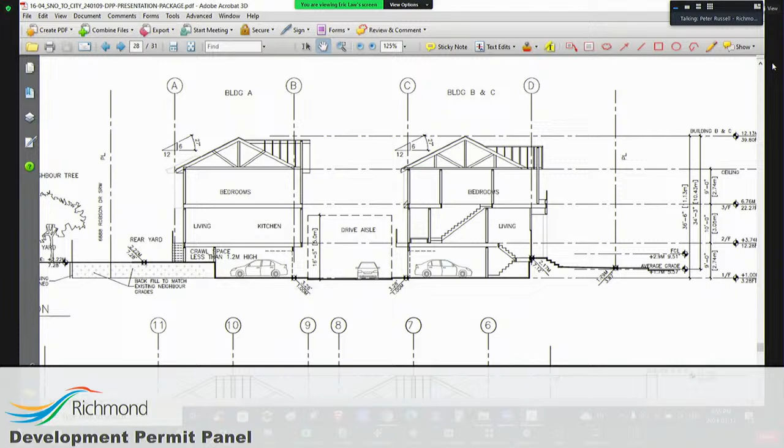Not of substance. I was curious about the step code application, how the boilers would be treated, whether it's going to be electric or gas boilers. You note the heat pump, but I'm just curious about the intention for the rest of it. Oh, the mechanical system will be, let me show you this one.

The mechanical system will be electrical, with a hot water tank located on the second level, above the floodplain level. So all the equipment will be on the second level instead of the ground level. The building heating will be by a heat pump system, but the hot water tank will basically be an electrical hot water tank.

I think going back to staff might bring the opportunity to put the equipment at grade potentially, so I think that's worthwhile to go back for review as well. Okay, I don't have any additional comments. I think we'll end up seeing this development again when it comes back to address the grade issue.